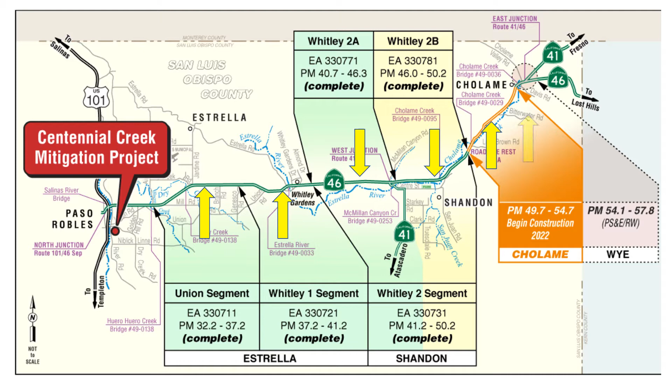The purpose of the Centennial Creek Mitigation Project is to restore stream function and value at Centennial Creek by creating, enhancing, and reestablishing approximately 4 acres of wetlands and other waters to satisfy state and federal mitigation requirements. The project is needed because the Route 46 Corridor Improvement Project will cause unavoidable impacts to aquatic resources and mitigation is required. On-site mitigation has been maximized within the Route 46 right-of-way, and additional off-site acreage is required.

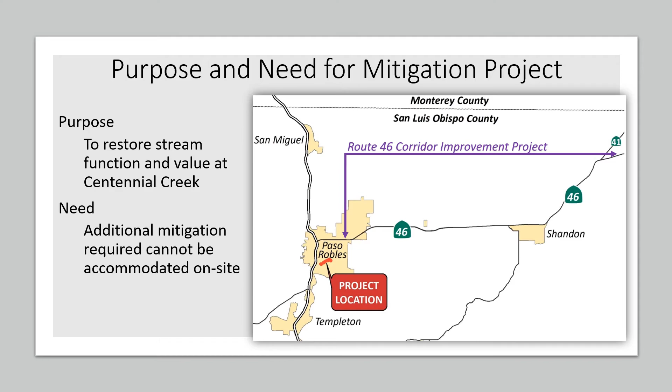All outstanding off-site mitigation from all sections of the Route 46 Corridor Improvement Project can be accommodated by the Centennial Creek Mitigation Project. A total of 3.82 acres of wetlands and other waters will be restored, enhanced, or established at Centennial Creek during Phase 1, which slightly exceeds the mitigation requirements of 3.77 acres. A second phase will allow for an additional third of an acre of other waters restoration for future mitigation needs.

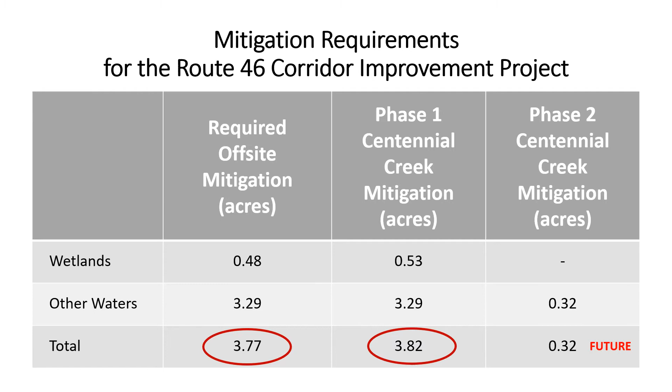I will now briefly describe the project and potential environmental impacts.

Centennial Creek is a small direct tributary to the Salinas River and winds its way through an open space corridor surrounded by an urbanized portion of Paso Robles. Centennial Creek is surrounded by a community center, recreational facility, 3 schools, and several housing developments.

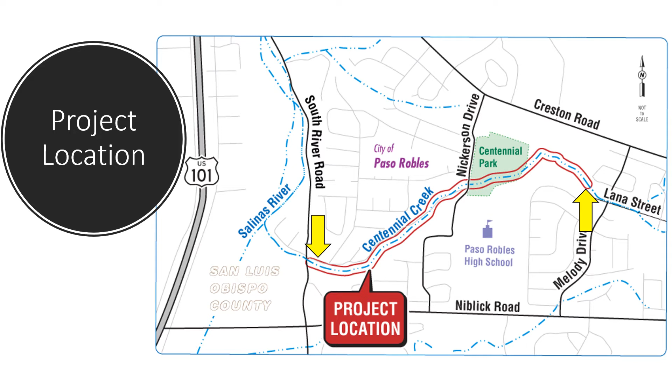The mitigation project runs along Centennial Creek for 6,300 feet and begins upstream at the end of Lana Street and extends downstream to South River Road. A paved bike and walking path follows much of the creek within the project limits. Culvert crossings were previously constructed in locations where the path intersects the creek.

These undersized culverts, combined with a high degree of impervious surface in the stream's urbanized watershed, contribute to the creek's incision and scour. Flashy flows that result from impervious surfaces cause water to flow through the system very quickly, missing opportunities for filtration of pollutants, settlement of sediments, and infiltration that recharges shallow groundwater. These systems often become impacted by erosion, and the surrounding vegetation communities become disconnected from shallow groundwater that is important for sustaining growth through the dry season.

Additionally, valley oak woodland comprises portions of the creek corridor, and several large oaks have recently fallen into the creek as a result of erosion and incision along the banks of the creek.

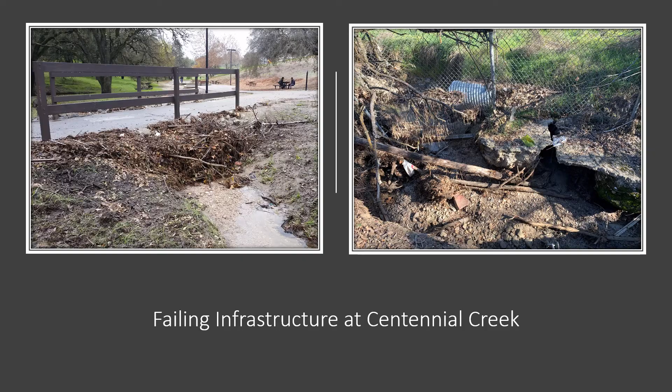The project includes a combination of improvements to the creek which will all work together. Grading is proposed to widen the narrow creek channel into shallower floodplain benches and develop roughened riffles. This will be discussed more on the following slides.

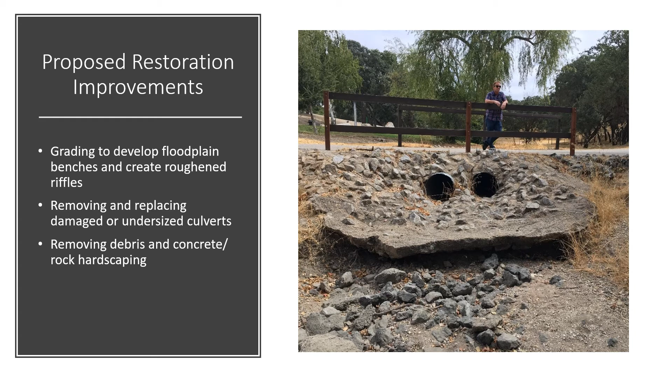Undersized culverts and associated hardscaping, rock, or rubble concrete will be removed and replaced with appropriately sized culverts in 2 locations along Centennial Creek. In some locations, existing concrete rubble piles and debris will be removed and replaced with engineered stream bed material.

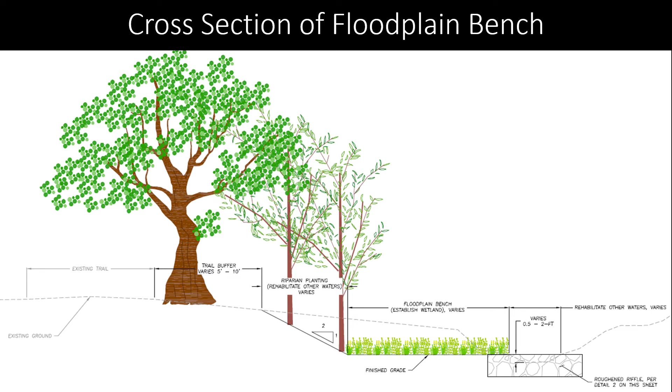Due to the incised creek channel, grading will be required to develop floodplain benches, as shown in this cross-section. The floodplain benches will widen the narrow creek channel and create secondary channels and pools. The grading will also increase wetland and riparian areas to restore connection with the active floodplain, provide nutrient retention, groundwater recharge, floodwater storage, and wildlife habitat.

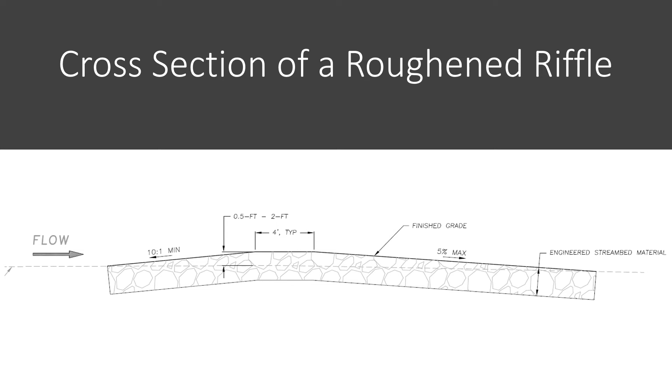A plant establishment period will span 3 years. It will be followed by a monitoring period of 7 years for a total of 10 years after planting to ensure the project meets agency success criteria.

Project design, implementation, maintenance, and monitoring will be the responsibility of the Upper Salinas Las Tablas Resource Conservation District through funding provided from Caltrans. Caltrans will also establish an endowment to ensure that the project site is monitored and maintained in perpetuity. The property will remain under the ownership of the City of Paso Robles as a designated open space element, with the site protected by a conservation easement.

Technical studies conducted by Caltrans concluded that with the implementation of appropriate avoidance and minimization measures, the project would not substantially degrade the quality of the environment. Overall, it was determined that the project will instead enhance the quality of the biological and aquatic resources within the Centennial Creek corridor. Caltrans intends to adopt a negative declaration under the California Environmental Quality Act, or CEQA, and a categorical exclusion under the National Environmental Policy Act, or NEPA.

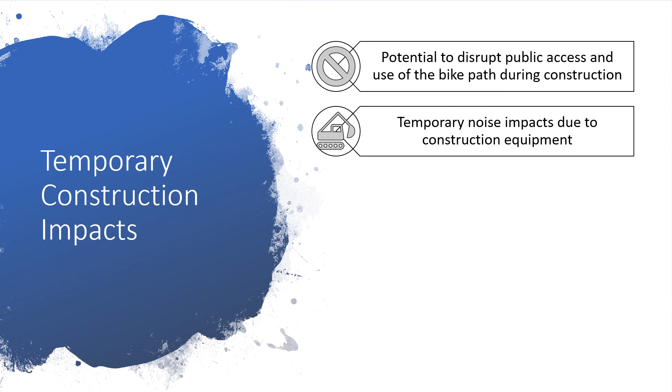Construction equipment may increase noise levels during the day. To minimize temporary noise impacts, standard noise control measures and thresholds will be adhered to during construction.

The project may cause short-term construction emissions and dust resulting from the use of heavy equipment during construction. These impacts will be temporary, and the contractor would be required to comply with applicable air pollution control prevention measures.

Tree trimming or removal and ground disturbing activities may disrupt wildlife during construction. However, the contractor will be required to conduct wildlife surveys before construction to ensure there are no species present before tree trimming or ground disturbing activities.

Grading during construction has the potential to impact state and federal waters. Ground disturbance will be limited to the dry season to minimize impacts, and stormwater pollution prevention measures will be implemented during construction.

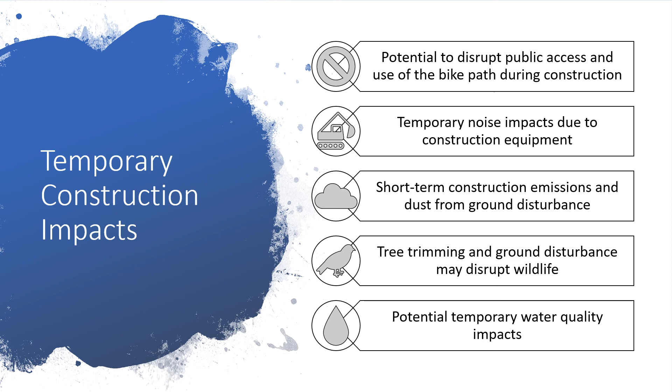You may view the draft environmental document by visiting the project website under the Environmental Document tab and clicking on the icon. A hard copy of the draft environmental document is also available at the Caltrans District 5 office.

There are 3 ways to submit your comments. You may complete the electronic comment card on the Centennial Creek Project website under the Submit Comments tab and filling out the online form. You may also submit comments by email or postal service to the attention of Jason Wilkinson, Environmental Branch Chief, as instructed on the project website. Comments must be submitted by the deadline of September 17, 2021.

After the public comment period closes, Caltrans will review comments and address them in the final environmental document. We anticipate the final environmental document will be released around November of this year. Engineering and final design is expected to be complete around the same time.

The Upper Salinas Las Tablas Resource Conservation District and the City of Paso Robles will hold a public outreach workshop at Centennial Creek next year prior to construction. We estimate Phase 1 construction to start next summer and expected to span approximately 7 months.